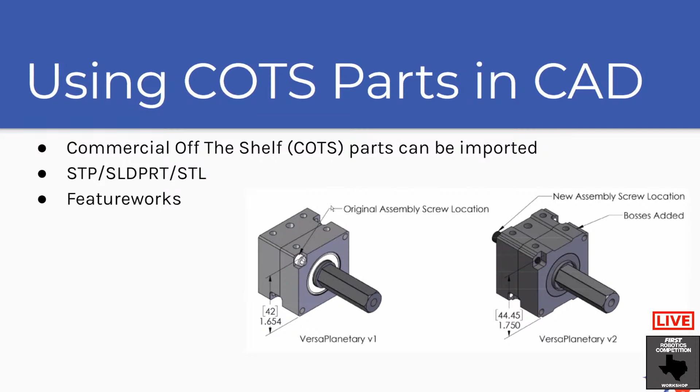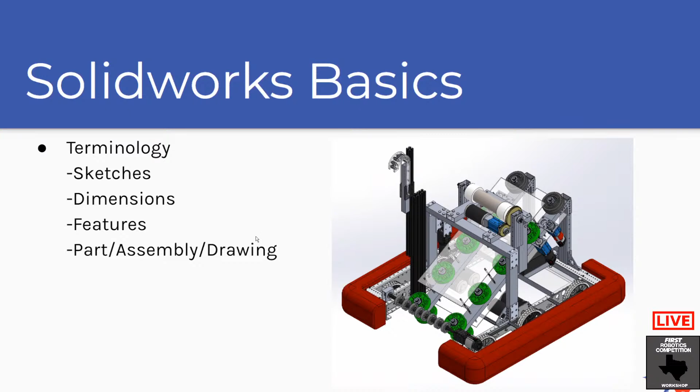I'm going to go over how to download those parts, how to import them into SolidWorks, and how to use them in assembly, as well as the basics. I'm going to do a little demo showing what these terms mean, and how to do a very basic CAD that most of you will probably have to do at some point in your season.

So let's open up SolidWorks, shall we? Here we have wonderful SolidWorks 2019. We're just going to make a brand new part here. So let's open a new part. And we're greeted with our lovely gray screen.

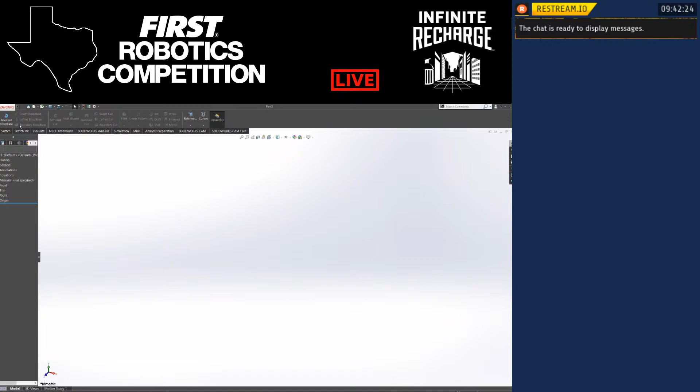The first thing you always want to do is create a sketch when you're making a part. SolidWorks works off of a system of sketches and then extrusions and features based on those sketches. So you make a 2D drawing, then that 2D drawing becomes a 3D shape, and that 3D shape can be modified in different ways so you can get all the different features you want.

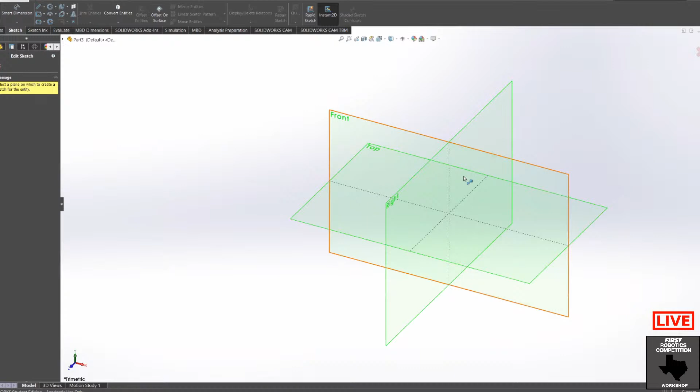So let's start by sketching. We're going to sketch out a piece of Versa frame, some 2x1 extrusion - that's your 2x1 aluminum bar. We're going to start by making a center rectangle right here in the middle, placing it at the origin, making sure that stuff is centered around the origin. Make a second one here.

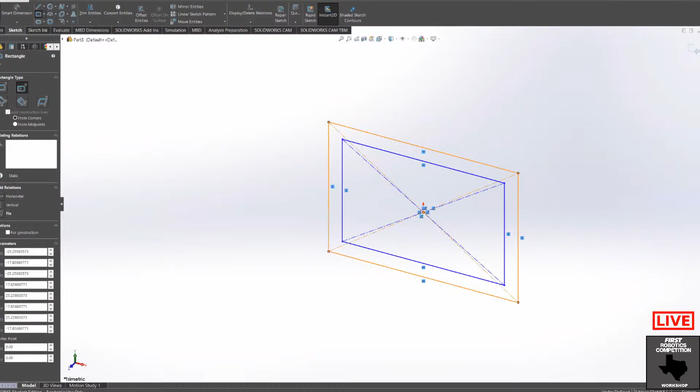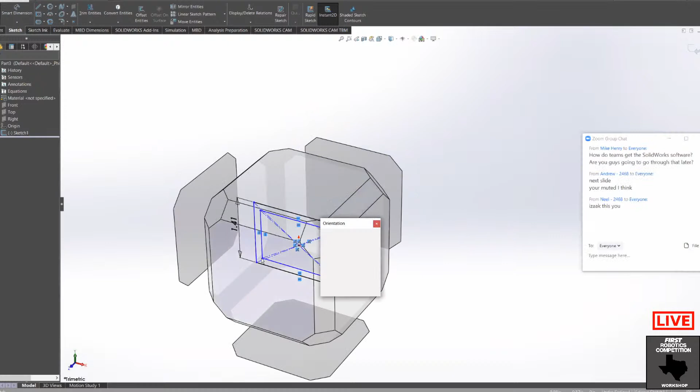Another very important SolidWorks term is dimensioning - a smart dimension. Oh, I'm sorry, my units are not being happy with me. Dimensions allow you to make sure that things are measured properly and those measurements won't change.

For instance, it's a 1x2 piece of extrusion, so it's going to be an inch tall. Oh, let's fix this middle one - this guy's a little too big. And we're going to make it over here, it's long. Now, if you notice, these parts became black once I dimensioned them.

That means that those parts are defined. So if I try to move these around, they won't actually move back and forth, unlike the blue parts, which are undefined. This is just SolidWorks' way of knowing that it has fixed dimensions. You can set dimensions in this box down on the left.

However, those won't stay if you change, for instance, another thing in the assembly. So you want to always make sure when you're CADing for clean robot CAD that you're smart dimensioning a lot of stuff. You don't want to over-define things, but you do want to make sure the dimensions hold.

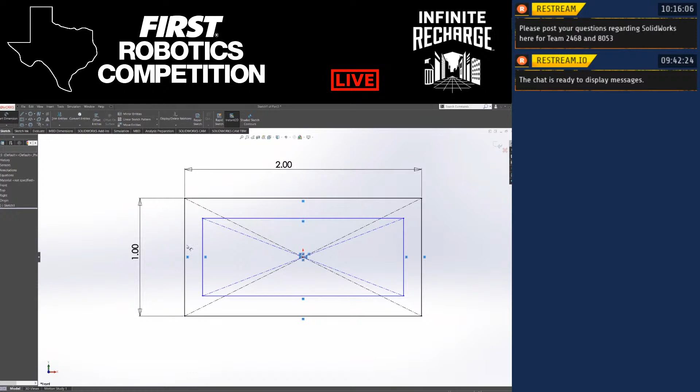And that you don't end up accidentally changing parameters that you don't want changed. The last thing I'm going to do here is set this - this is going to be our wall height. I'm going to make that an 1/8 of an inch. Do it on that side.

Another neat thing we can do is I use a lot of relations, where you can hold Control while you click. So I'm going to click this, click this, I'll get this add relations bar on the side. Relations are basically different relations between geometry that can help you define what you want things in accordance to other things without having to do math yourself. It's essentially SolidWorks doing geometry for you.

So I could just define this other side as 1/8 and be done with it, and I'd have a fully defined sketch. Or, because I have these helpful center lines here, and I know that if I want my wall height to be the same, I could have them - or no, that wouldn't work. I'm sorry. I could... here, just give me one second.

Sorry about that. I was just talking about how relations can help you relate parts of geometry in a way that makes it work for you. If we do these collinear, those lines will always match up. That didn't quite come out the way I wanted because this is a rectangle, but you can use relations to define some things.

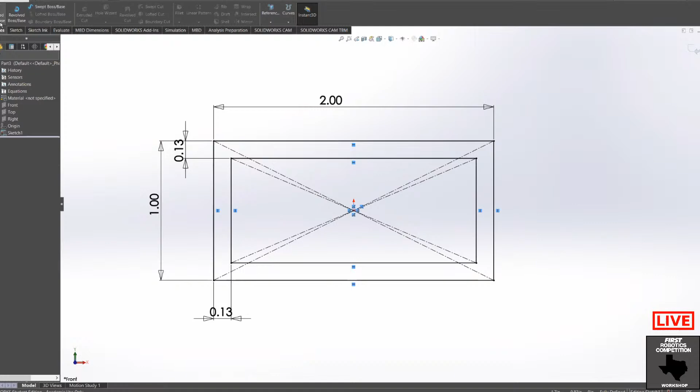So we have the sketch tab here, which is mostly for sketch tools, and then we have features. There's a lot of features in SolidWorks, but the one you'll probably use more than any other is the extruded boss base feature. That takes your sketch and extrudes it outwards, basically making it into a block that comes out.

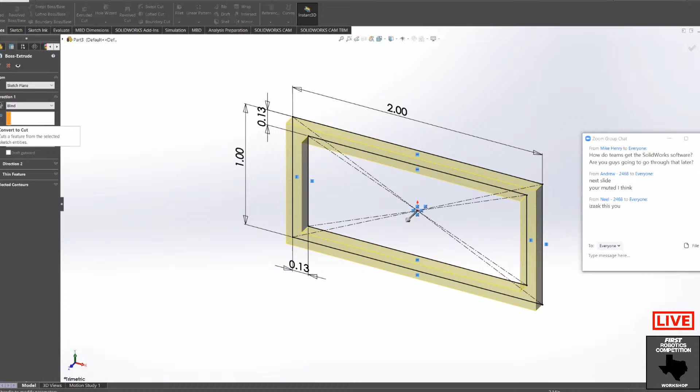It automatically selected this contour here, this box, because it detected that automatically. If I wanted to, it could do the middle box, but we don't need it to. We're just going to go here and call it 6 inches. So we have a 6-inch bar right here. That looks pretty good, so that defines our length.

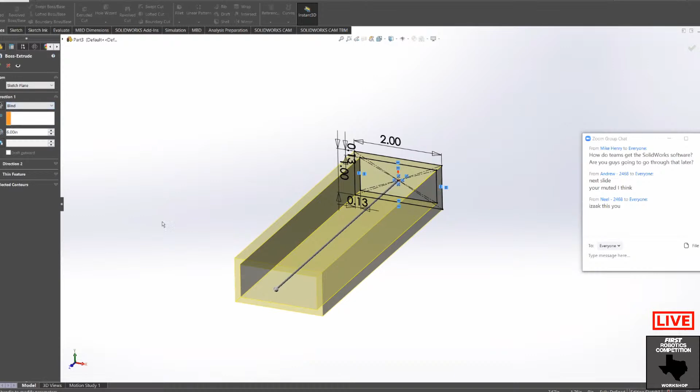We're going to do blind. This is used for relations to other geometry, but for now we're just doing blind, which means it doesn't care about anything else in front of it or behind it. It's just going to go completely blind forward. So we do that, and ta-da, we have our little 2x1.

Though I did say I wanted to make this VersaFrame, which, if you don't know, has holes evenly spaced at 1-inch increments in the side. Those can be used for mounting gussets, which Versa also makes. So I'm going to show off another cool feature you'll probably use a lot, called patterning.

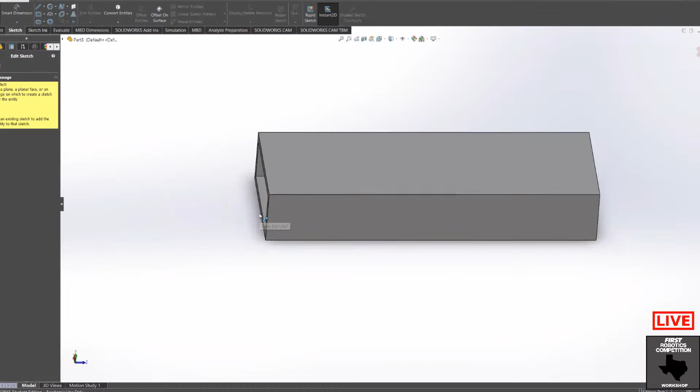So we're going to start a new sketch, a completely new feature, except this sketch is going to go on the side of here, because that's where the holes generally are - 1, 2, 3, 4 - and they're holes that cut all the way through. So we're going to sketch on this side.

Another handy trick: if you hit the space bar, you can pull up this little block thing, and it will let you select which face you want to be looking at, so you can perfectly align your part straight. VersaFrame uses holes, so obviously that's what we need.

So what we're going to do is sketch a circle. SolidWorks also has this neat feature where it will tell you exactly the middle point of this, like that. Make a hole, check. Now this hole is blue - it's not defined, but I do want to define it.

So let's go from this to the edge, and make that distance 1/2 inch. Generally, that's how you'd want to cut it if you had real life VersaFrame here. So we'll do 1/2 inch. It's already kind of, see how it's up and down.

What we can actually do, I believe, is make it so that this and this are - no. If we want to make it fixed right in here, one thing we can do is make a center line, push that center line to right there, and that'll make it so this guy does not want to move. The only thing that's variable about this is the holes. So we have that going for us.

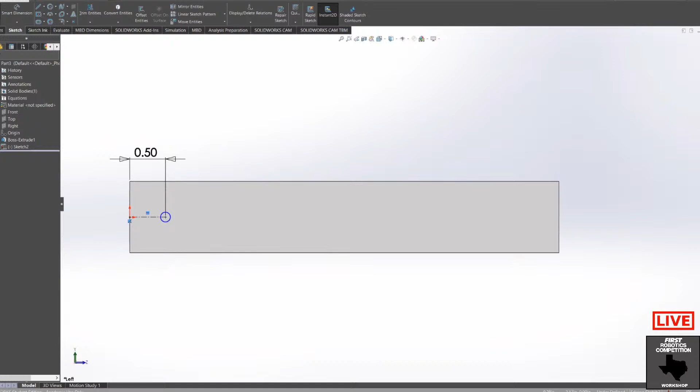Yeah, so you can look up a lot of these features. Let me switch my screen real quick to Google Chrome one more time. So you'll see, the VEX website has a lot of really good resources.

Aside from CAD files for these actual parts, if you wanted them, there are certain reasons you wouldn't want to download these parts. While they're helpful to have, you can do a lot more with your own parts often. But the thing they do have that's very nice is drawings.

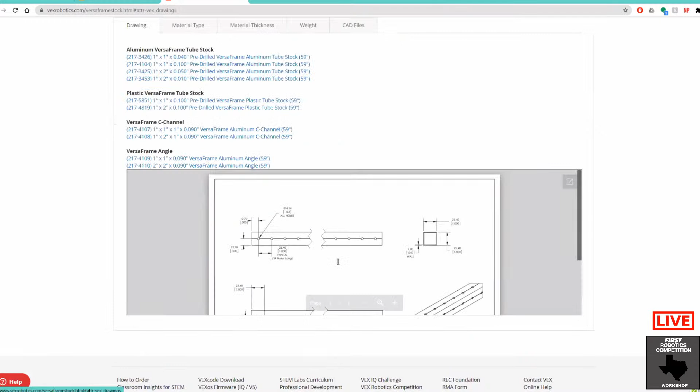So this drawing, I think I can open up here. Yeah. These drawings let us determine some dimensions about this - what these distances are, that's 1/2 inch, 1/2 inch there, there's a 1/2 inch distance there. Typically there's a 1 inch there. It tells us the wall length.

I made a little bit of a thicker wall, but that's okay, we can change that if we need to. It's 0.04, so we'll change that when we get back into the CAD. And then it tells us how big the holes are - it's 0.163, which I'm guessing is 0.1625 because it's an eighth, I believe.

These drawings are super helpful because they make sure that when you're CADing a part, a lot of manufacturers that don't provide CAD files almost always will have a drawing you can find and base off of. You just read this - it looks just like it's SolidWorks, probably done in SolidWorks because SolidWorks lets you generate these drawings. It gives you a way to double check what the holes are, what these distances are, what my design constraints are, how this all works.

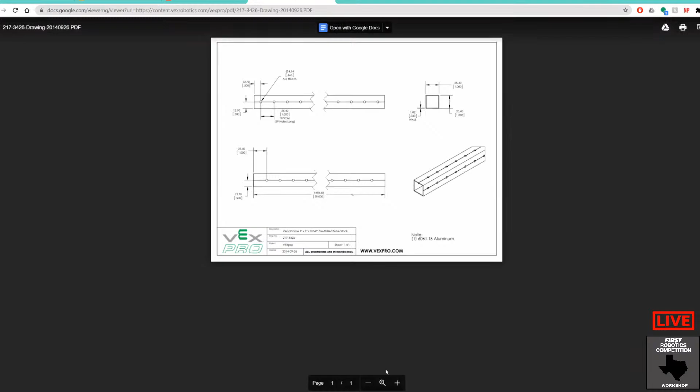So if we go back into SolidWorks, we can set these correctly. You can smart dimension this circle, and we could say we want it to be 0.1625. There we go. And that hole is now defined. Sorry, I'm moving around a lot.

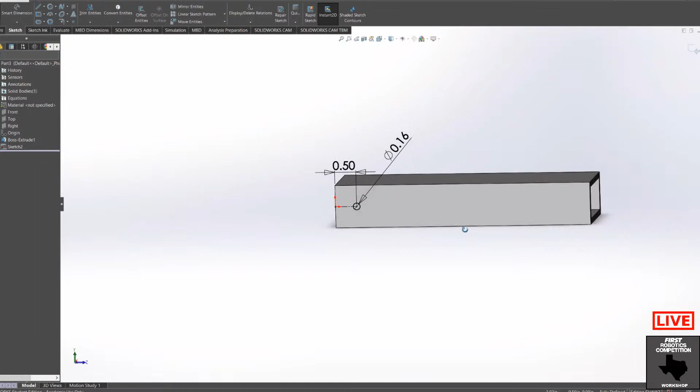And then the cool thing - so we want these holes. Now what we could do is manually CAD a hole every inch down the entire length of this thing, though that would be completely impractical because we'd have way too many dimensions and way too much geometry. In general, when you're making something with a lot of moving parts in a really big assembly, you want to CAD efficiently if possible, so you're not rendering too much and not putting too much strain on your computer. Because when you get into those really big robot CADs, that can strain your computer really, really bad. So we want to CAD, and it comes down to tiny little optimizations.

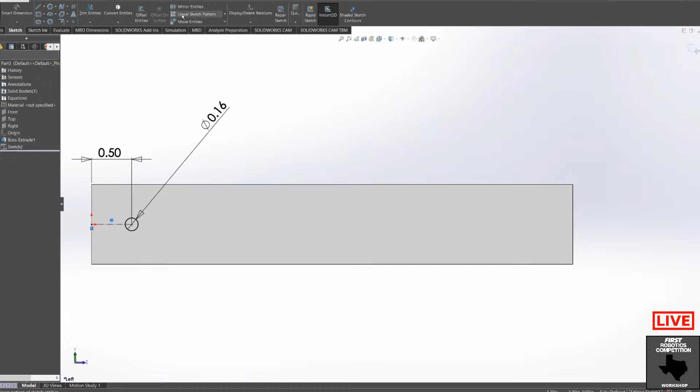But one thing we're going to do is a linear sketch pattern. So we'll select this here, and you see it made a little copy. Basically what a linear sketch pattern does is take whatever sketch feature you have, say the circle, and copy it linearly - it can copy it down a line, up and down, left, right, or even make a grid if you need. But right now we're just going to use it to make a line of evenly spaced, exactly the same copies of this hole. So we've got the spacing between them.

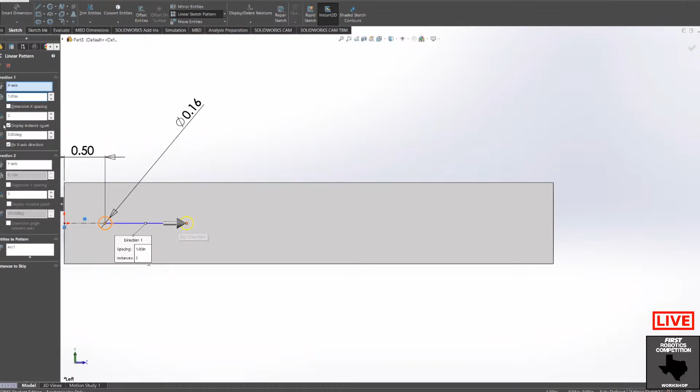Because the drawing said we wanted them an inch apart, we set that spacing right here. And for instances, we're going to put 5 down - no, we can do 6, since this is a 6-inch bar. 6 of these, as you can see, it's going to make 1, 2, 3, 4, 5, 6 - it's going to make all of those. Here's where you select your entity to pattern.

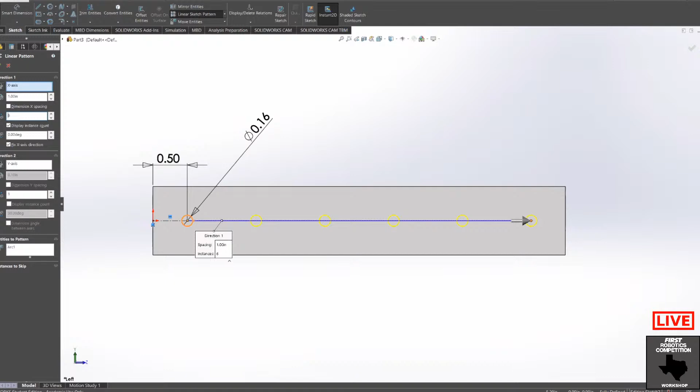If I wanted to pattern it in the other way, I could do this, which lets me flip direction. But for now, we're just going to do it this way. And you press check, and look at that—we've got all our circles exactly the same, all put in there, all nice.

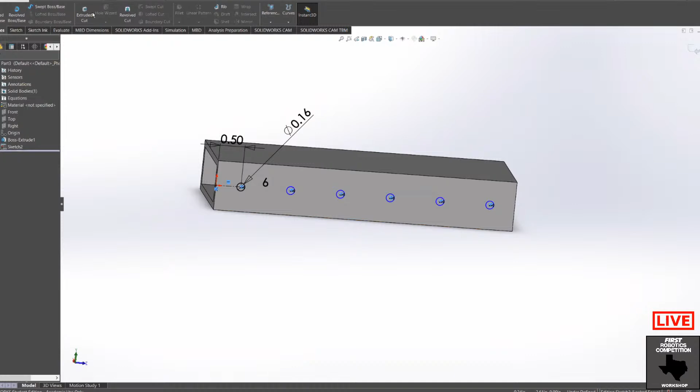So our last thing we want to do is cut these out. In SolidWorks, just like there's an extruded boss base, an extruded pull out, there's also a negative one, which is the extruded cut. This works exactly the same as the other one, but it's subtractive instead of additive. So what I just did, as you can see, it's taken these guys and cut them.

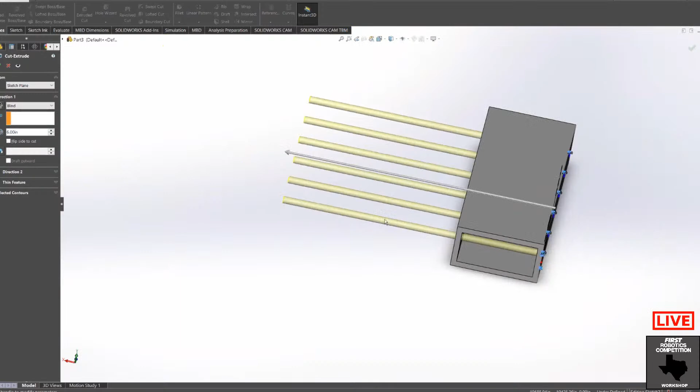Now this is set to blind still, if you remember. That means it's going to go forward 6 inches and cut all of this, or however many inches there are back here. We don't really need that—we just want it to slice the whole thing. So we can select through all, and that just means it'll cut through anything in its path. Anything that is there will be sliced in this hole pattern. So you just select that through all.

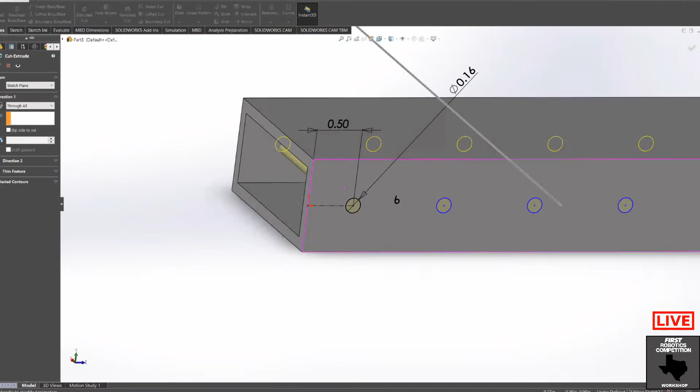And if we go cut, ta-da, we've got all our holes, all spaced super evenly. And it's almost all up to code.

Actually, what we can do is modify this. For instance, we got this wall thickness wrong. It was supposed to be 0.040 inches in the drawing, but we made it like 1/8 of an inch.

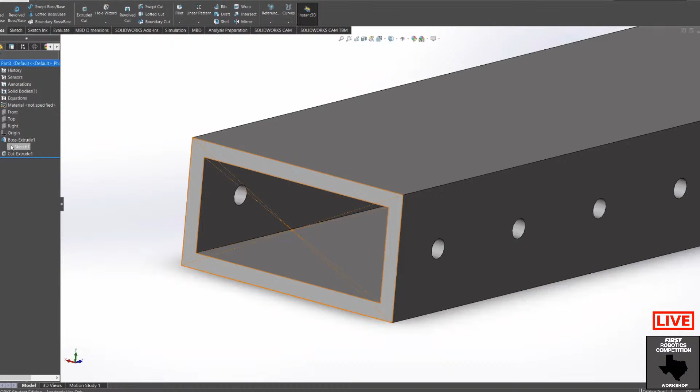You can find some extrusion, but if we're doing VersaFrame, let's make it stick to the dimension they want. So to fix this, on our left tab we have every feature we've done. We can click this little arrow below and access the sketch, edit the sketch. What we can do here is go to these smart dimensions. This is what's so nifty about these—since we didn't get this dimension right, we can just change it.

So we can go 0.040, like that. And then we fix this one as well, to 0.040. Look at that—now our thing is square again. And these are the correct dimensions.

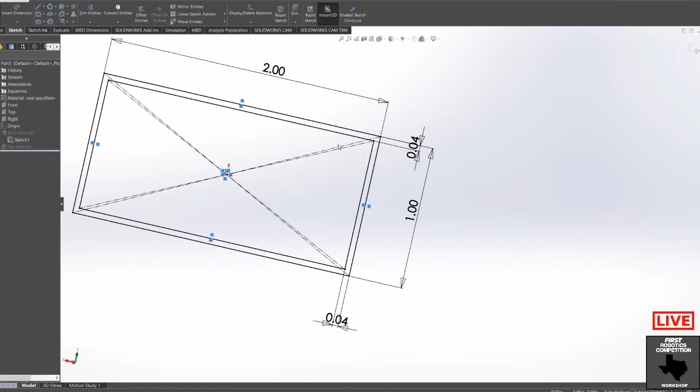So if we exit the sketch, SolidWorks will automatically update so that our VersaFrame is perfect. So there we go—this is our very nifty little VersaFrame.

We'll go over some advanced features later in this presentation so you can optimize this even better. This was just a very quick, kind of dirty intro to CAD if you're a super beginner. But we'll go over other things if this is not new to you, like how you can make a template so you don't have to CAD this every single time, or use a variety of different optimizations built into SolidWorks.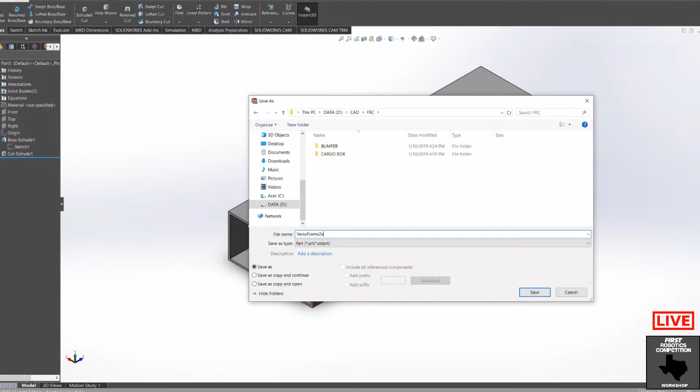The other thing I wanted to show off—let's go save this part. I'll save it into my CAD folder real quick, FRC. Let's put it in here and we'll just call it VersaFrame 2x1. This is not really a proper naming convention, but it's just there.

But you, of course, won't CAD every single part you find in your robot. You'll have a lot of different parts in your robot that you don't CAD, maybe even most of them. In the example of my team's robot, let me open up the CAD.

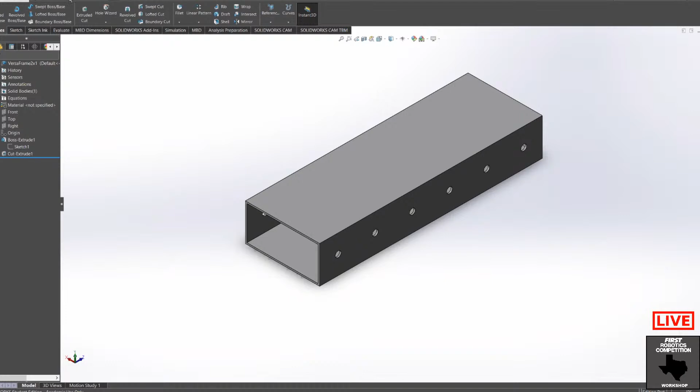I'm going to close out of that for now. Not that—please open up. Let me go, oh no, I need to find it again. Hold on a second. Sorry about this.

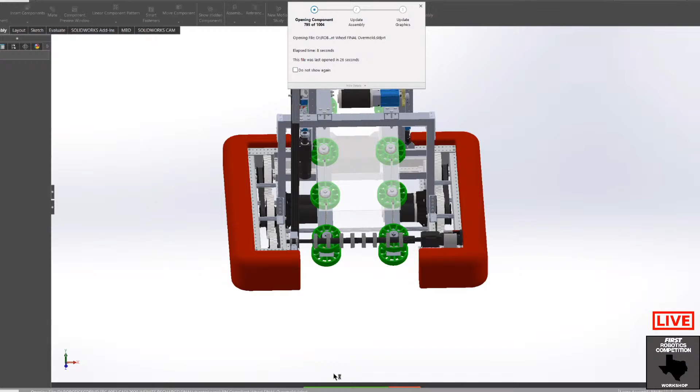We are going to just look at the CAD, a completed robot CAD. So if y'all can see this, this here is our—yeah, so we're just going to suppress all missing components here. Oh yeah, sorry if I wasn't looking at the chat, sorry if I missed zooming in the drawings. Oh, SolidWorks is being unhappy.

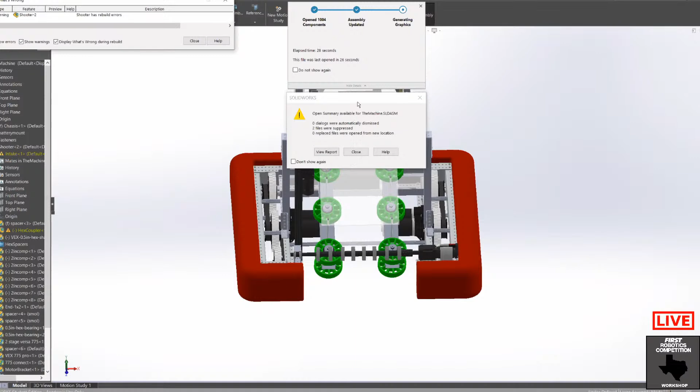Here we have a complete robot CAD. Let me just sketch this, set this like this. So here is what our finished robot CAD looks like.

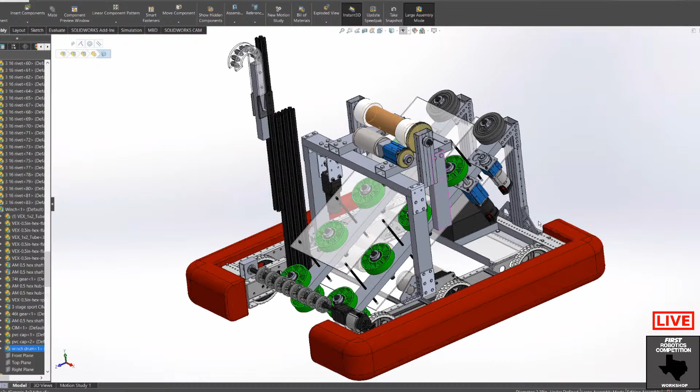So we've got all sorts of nifty things here. As you can tell, these are 2x1 extrusions. We have a lot of parts in this robot. However, we did not CAD every one of these parts ourselves. We have a lot of parts in here that are definitely not ours.

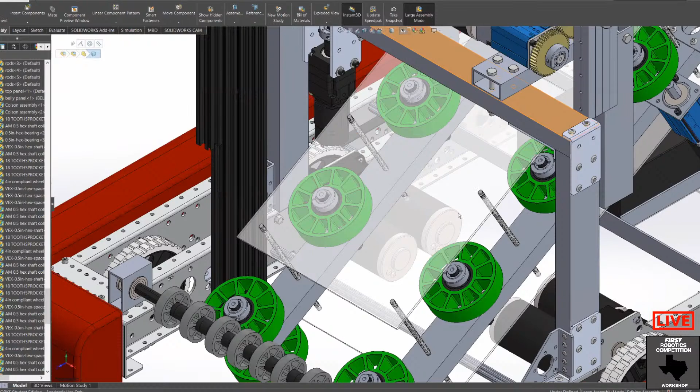So for instance, this motor with a 775 Connect, this red line, we didn't CAD this by hand. We downloaded that part off the internet. Same with these sprockets and these.

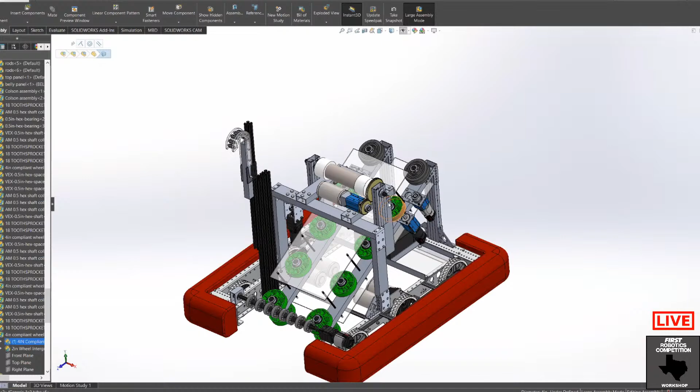Now you could CAD every part by hand, but that's not a good idea, because you want to make sure that everything is exactly up to manufacturer spec. And if you mess up and it's different in your CAD than it is in real life, you could run into all sorts of terrible design constraints or design issues. So we've downloaded a lot of parts here.

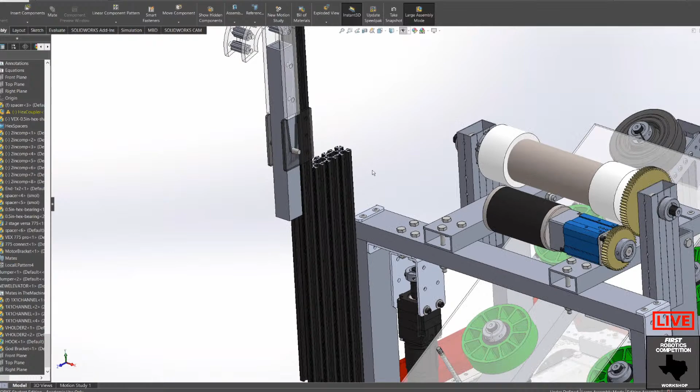Even this 1x1 channel, these gussets here - I'm actually going to show off how we can download a gusset and affix it in an assembly to our nifty little Versa frame that we just made. Here's the Vex tubing, which is similar to Versa frame.

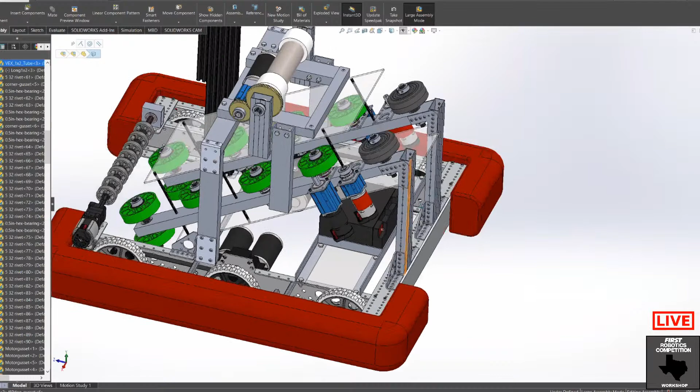Yeah, or a battery, for instance. There's a lot of things in here that we didn't CAD, that we couldn't have CAD'd, just because we want to make sure it's up to exactly manufacturer specification.

So here's our quick little demo of our robot. We've got our shooter, our intake. We don't generally CAD electronics, though you can.

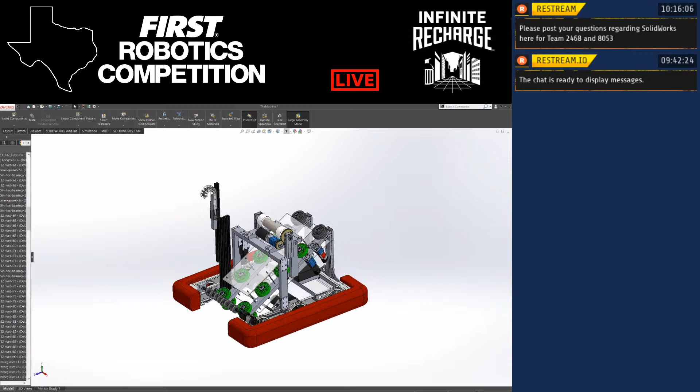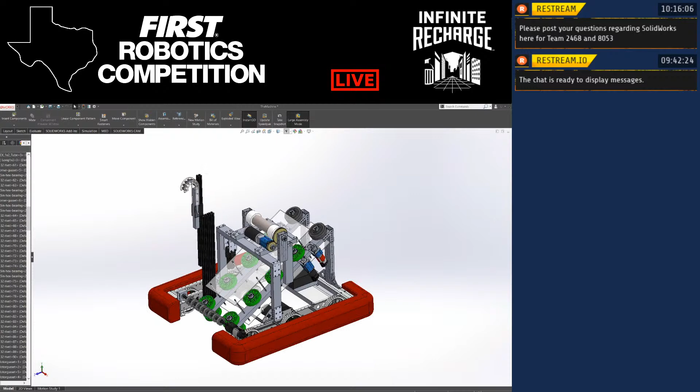It's just a lot of things. You might want to CAD just big bodies for electronics to make sure you can know where they all rest and whatever, and those will be parts of your CAD. Your CAD can be - but our CAD isn't truly encompassing of what our robot looks like, but it is almost every major feature.

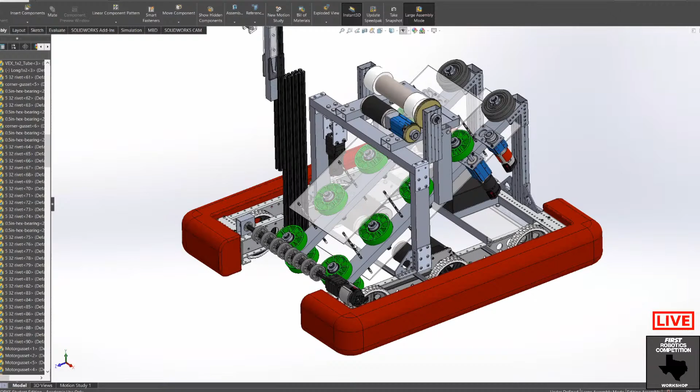So for instance, we don't CAD every single little nut, for instance, that's affixing these two. But you certainly can, and you should when possible. So we have rivets in here, and you should, whenever possible, CAD bolts and nuts like this. We do have, but yeah, so you just use this.

This is our robot CAD. We use this, and our robot looks almost exactly like this. And you, of course, use this. This is a month of work on CADing, a lot of nights working on this.

So yeah, let's go over - let me do the quick little download demo. So we can close out of this, don't save. I wanted to do a demo. Let me screen share back to Google again.

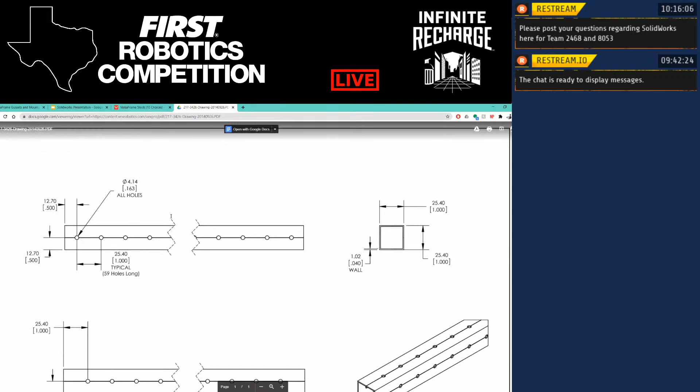Sorry, this wasn't zoomed in on here, but I can zoom in these drawings a little bit if you want to look closer. We've got our holes, we've got our dimensions here. And as you can see, these are laid out just like SolidWorks dimensions, very conveniently. It tells you exactly what these are - wall, inch, it gives you a metric, whatever.

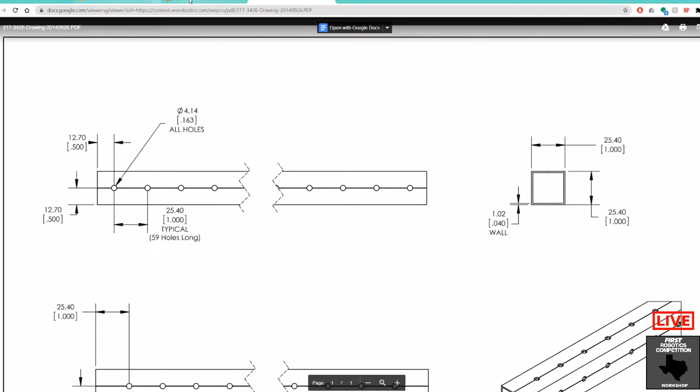So I'm going to just do this very quickly. We're going to go to gussets and mounts. I've already pulled up this tab here of our different gussets for mounting things. But we are going to download this little 90-degree gusset here.

So something you should know when you download these is SolidWorks works off of solid parts. And we don't actually have - most manufacturers, not most, but a lot of manufacturers, including Vex, who you'll get a lot from, don't actually give you a solid part which has all SolidWorks features. They'll give you what's called a step file.

So let's go download this 90-degree gusset. We'll download a little zip file, open this up, we get a step file. Extract it real quick - there's our something-step. So we've downloaded that.

Oh, you guys might not be able to see my library windows. Hold on, if I show off just my whole screen, share this. All right, yeah, we download this, extract it, and we get this step file here.

What we're going to want to do is open up SolidWorks, open - and SolidWorks can open step files. However, it goes through a little bit of a diagnostic when it does it. So I think it was - let me just double check - it was 3551, yeah, sorry. I was doing some demos earlier just to make sure this is all tested. So let's go ahead and open up this thing.

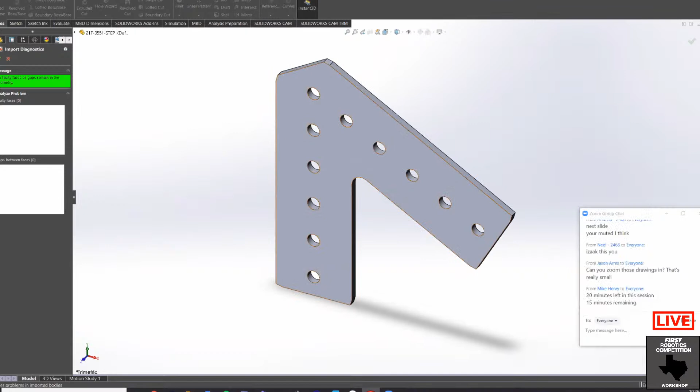So we'll load in the model. We can run import diagnostics just to make sure that nothing here is breaking SolidWorks. So it says, okay, it's fine.

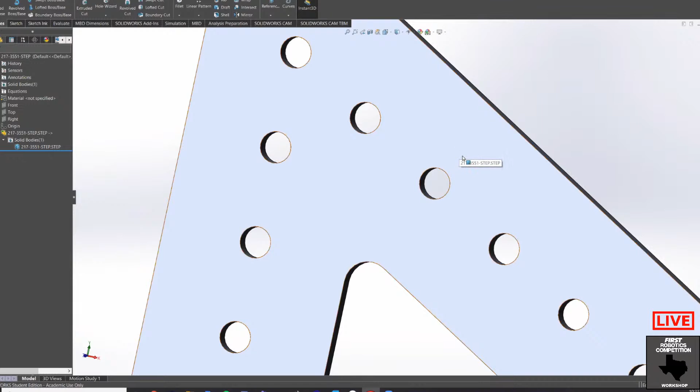And we get this. Now this is a solid body, which basically means it doesn't have a lot of features. Remember on our last part, it had a bunch of features. This is just one solid body here. We can still work with this. It just means we can't, for instance, change the size of these holes or something, which you probably won't need to do all that much, or you can do in different ways.

But right now, we're just going to show how we can mate this and do a very basic assembly with this to the frame we just made.

So what we can do is SolidWorks works off of, I talked earlier about terminology, but we have parts, which are individual little components. And then you have assemblies, which is multiple parts all put together. So what we can do here is go new and make assembly from part. There's also drawings, which is like what we looked at with the first one.

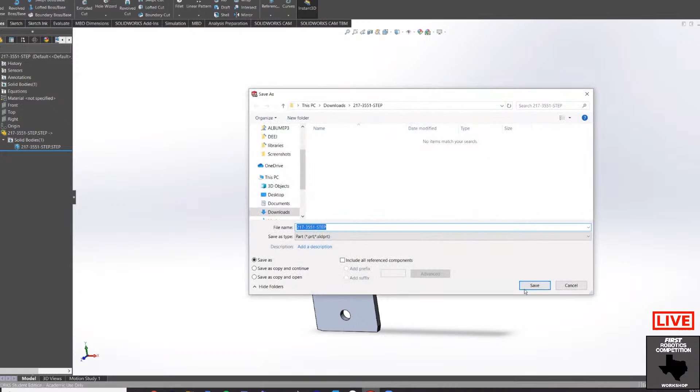We can save this file, save and insert. Let's just call it this-step for now. Normally you'd want to label this like the naming structures we went over. We can select that and place it in here.

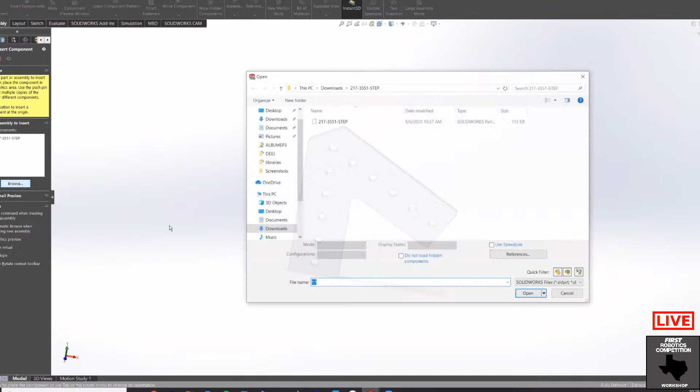Now we are in an assembly. It doesn't look very different, but it is an assembly. Our bar is different. And so what we have up here is insert components. We can browse documents. And if you'll remember earlier, we just stored in here, we have FRC, VersaFrame 2x1.

We can open this guy up and toss it in here. So now we've got both our parts in this assembly. These are multiple parts. We can't really edit these. We can kind of edit them on the fly if you need to, though in general you would probably want to just open up the part and edit it in there.

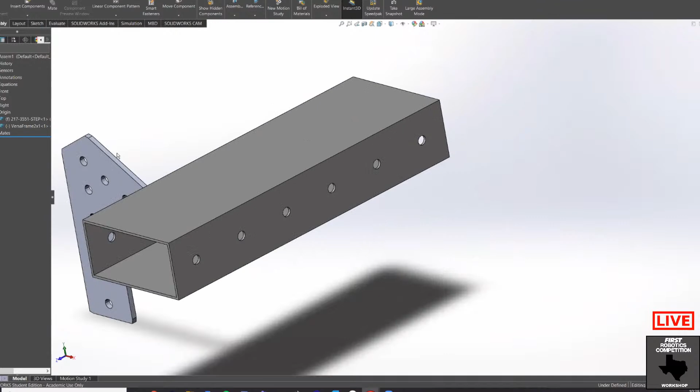But we want to mate these two together, which means we basically want to simulate what it would look like if they were joined together in real life. So to do that, we have, oh, this one's fixed.

I'm sorry, is it fixed? Give me a second. Float, yes. Float is the opposite of fixed. So we want this just to float for now.

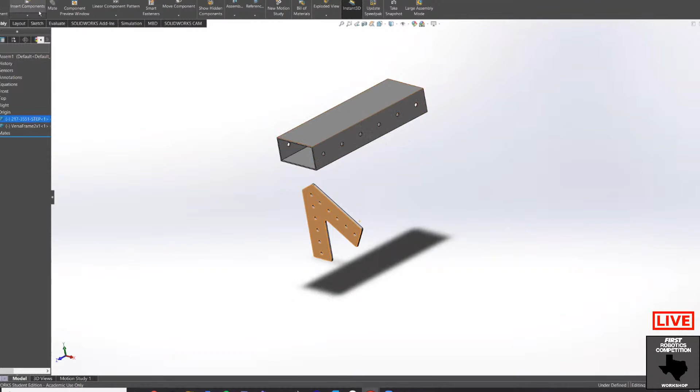So what we're going to do is hit the mate tool. We're going to select the faces we want to mate. It already had this one selected, so we can just work with that. Let's select this face. We go mate. These are coincident, which means these two faces will always want to be in that kind of plane of each other. And with this, basically, that's how you'll do mates.

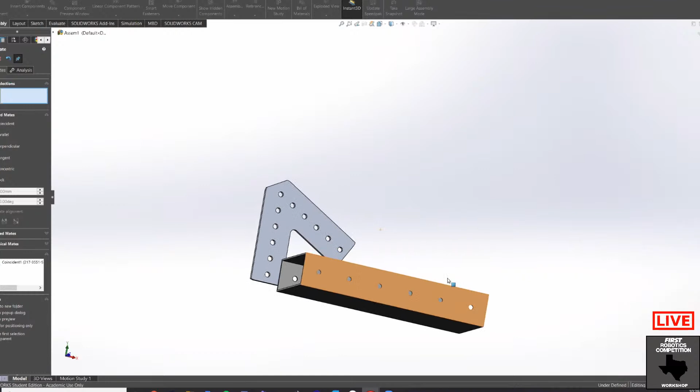What you want to do is, for instance, now if we want to mate, let's say we want to do this face here and this face here. And SolidWorks will pop it in there. And look at that, we have, oh no, see, this went the wrong way.

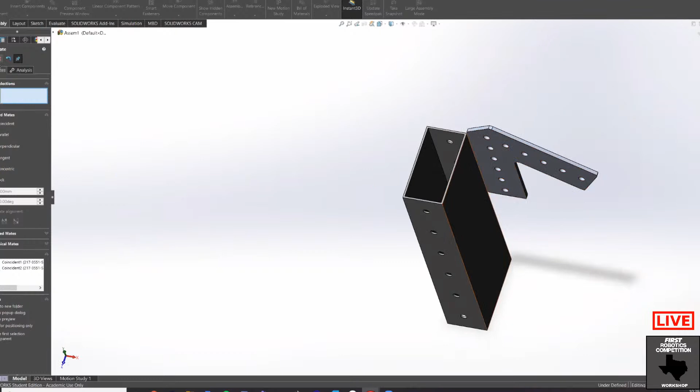So what we need to do is go into this, look at our mates. That was our mate. So we can go and edit this mate here, and just flip the alignment. It's always so much fun to watch him move around. Now, we can hopefully see.

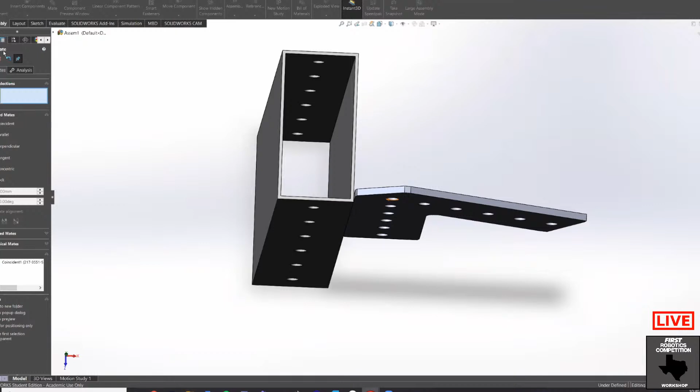I am not sure I quite did this right. Hold on a minute. Sorry about that. Yes, delete that. Let's do first. Oh wait, that wasn't correct either. I deleted the wrong one. Let's go ahead and mate these again.

So we're going to do this face to this face here, like that. That's oriented correctly. And let's do the holes next.

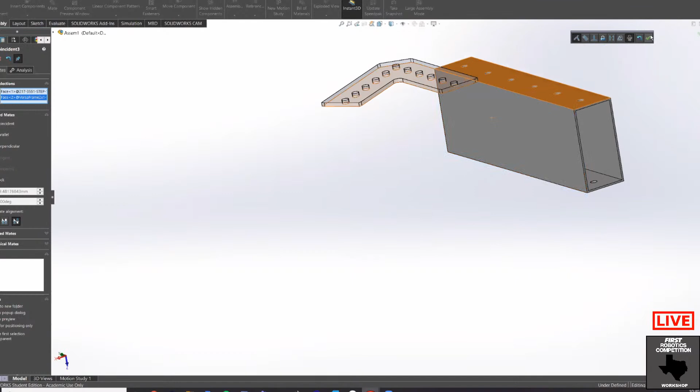So what we can do is mate the outside of this hole right there, and say this one. Yep, those edges are together now. And so in real life, you would probably put some rivets or something, but those are, I believe, fully defined together. They're not going to move. But yeah, so that's how you'd want to put that in there.

So as you can see, these parts overlap here. In real life, you would bolt these together with some rivets or bolts or something. But yeah, that gives us our kind of mate here.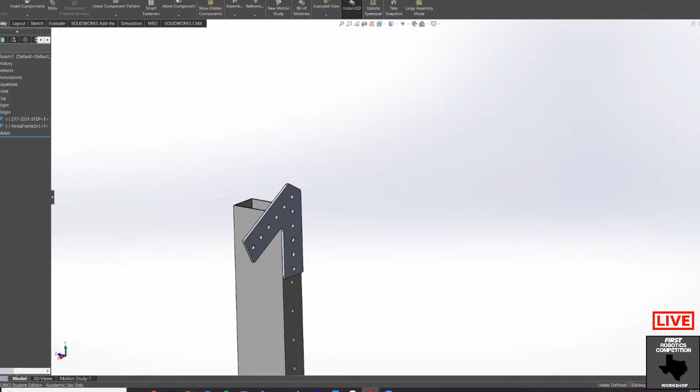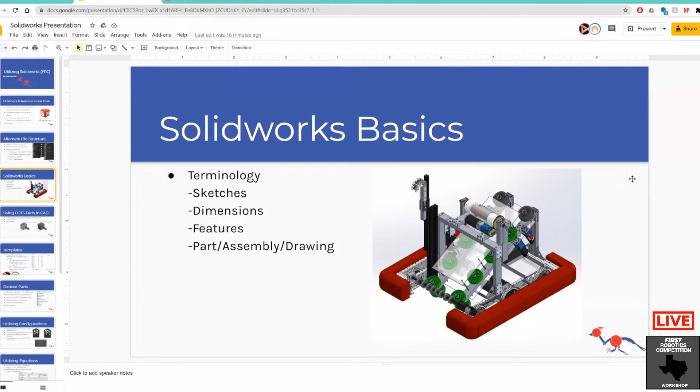So yeah, that's kind of a basic rundown of just SolidWorks features and kind of how we can use those features to do very, very basic robot CAD. So I'll hand it over to Andrew and Neil for the next section.

Since Isaac just went over the basics of SolidWorks, you can get a lot more complex. For example, if we're doing a full robot CAD, we're not going to be CADing individual 2x1s. Even though that's a valid way to do it, it's a lot easier if you have templates already pre-done.

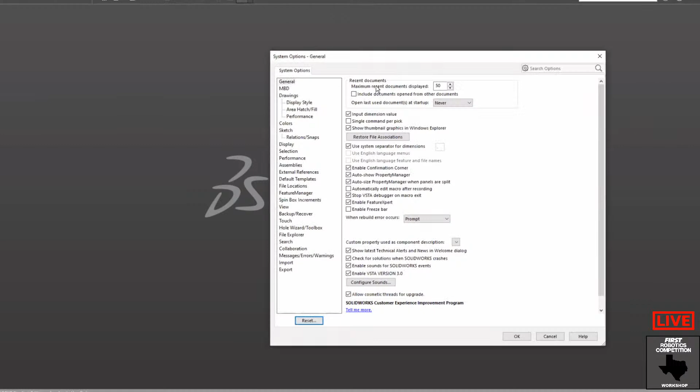I'm going to start a new file here. You'll see I already have a bunch of pre-made templates for things like 2x1, 1x1 channel. The way I set this up, we send the link of our presentation in the messages with a linked folder to our template files. To set that up, save the file somewhere, then go to Settings, File Locations, and set where your file location is for templates. It'll automatically pick up where your templates are, so when you click New, you'll get all your templates. It's a lot faster. So if I open this 2x1, for example...

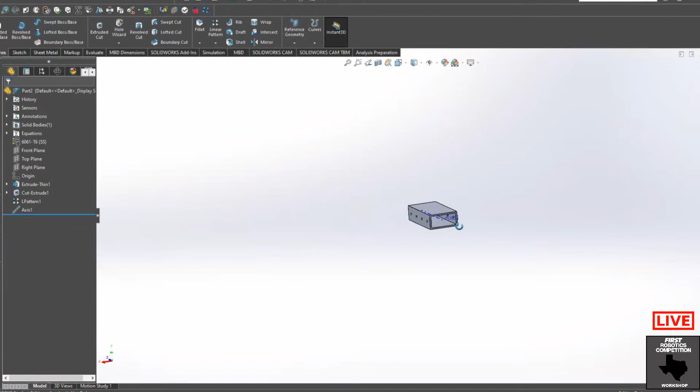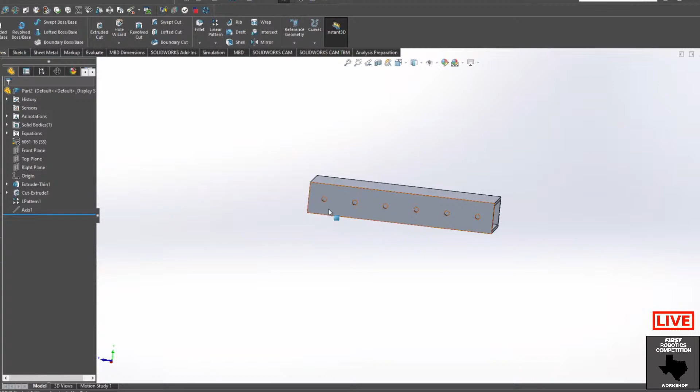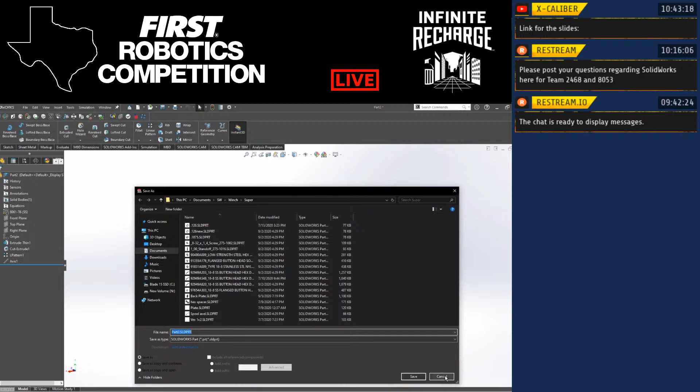It's just going to be like a 4-inch 2x1 by default. But with templates, you can change however long you want it. So if I needed a 6-inch 2x1 and click OK, it's going to update, and now I have a 6-inch 2x1. Then you can just save this as a part file wherever you want. That'll save you a lot of time, and you can do this for 2x1, axle, spacers, basically whatever you want.

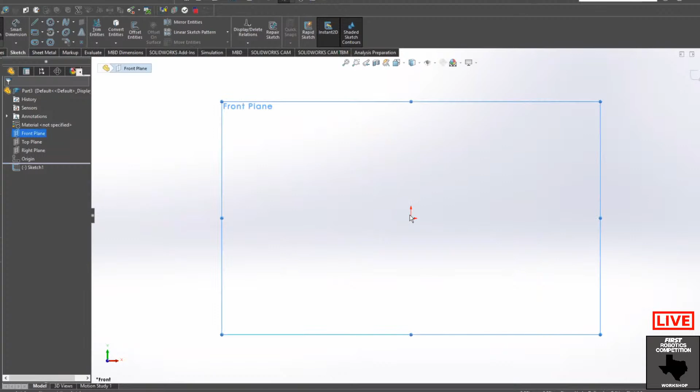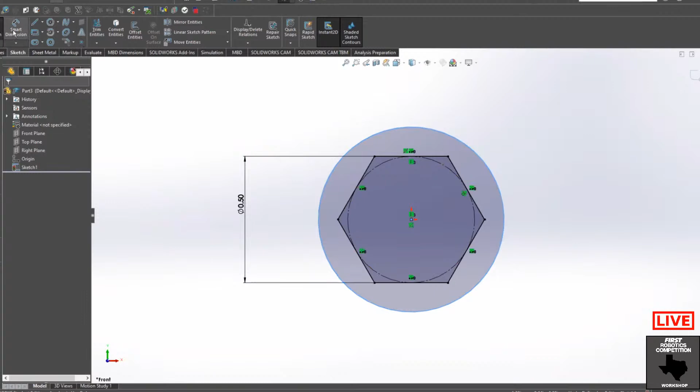Also, a cool thing with templates is you can actually make them. So if I start a new basic part, and say you needed a custom hex spacer that wasn't in our folder, or you didn't download our folder, you can easily make one. Just make yourself a hexagon, then decide what you need, like a half-inch axle spacer. Make another circle for your wall, and it's smart to have like a tenth wall thickness. That should be good.

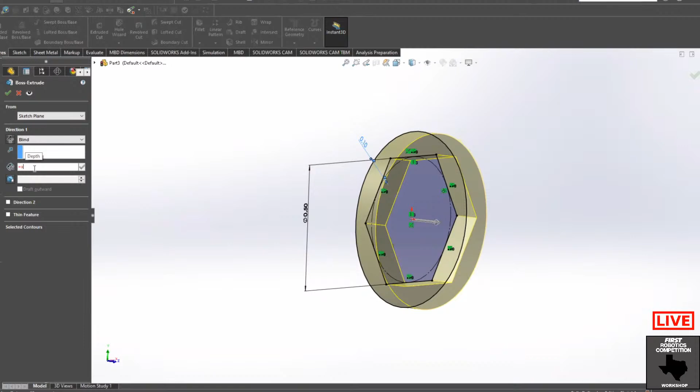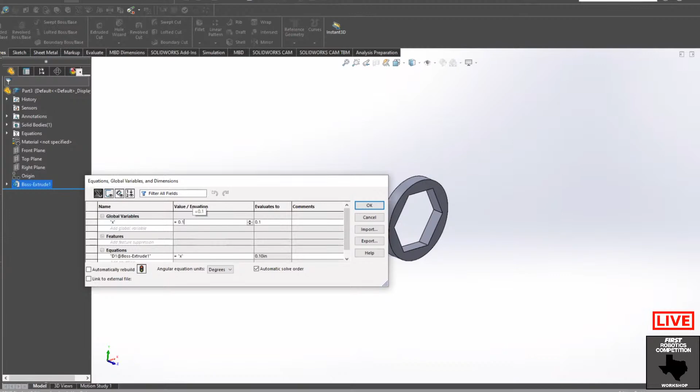When you click extrude, you're going to want to set this variable. We'll go over more complicated variables later in the presentation, but this is simple: you just put an equal sign and whatever you want your variable to be, like X, which creates a global variable, then click OK. Notice I set my boss extrude to 0.10 here. Then go up to Equations, click it, and you'll see we have the same setup as the other templates. We can change this to, for example, 1 inch, and it updates when I click OK. Now you have a 1 inch version.

The tricky thing with making these is when you save them, you have to save them not as a SolidWorks file, but as a .prtdot file. That will be your template. Then save it to your templates folder, wherever you set it to, and you should be good.